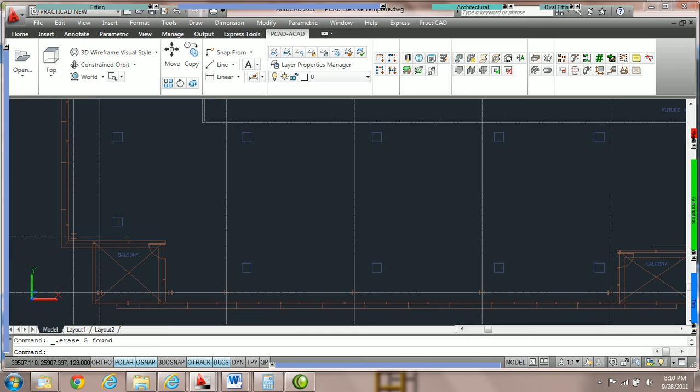Then I'm going to zoom into this quadrant and we're going to place a steel beam on the drawing bottom at 10 foot. To do this, let's go into our architectural bin. Remember, the icons in your bin might be different than the one in this tutorial. Select one that you'd like. In this exercise, I'm going to grab a wide flange shape. We're going to open up my catalog. I'm going to choose a W10 by 12, but you can utilize any one that you'd like.

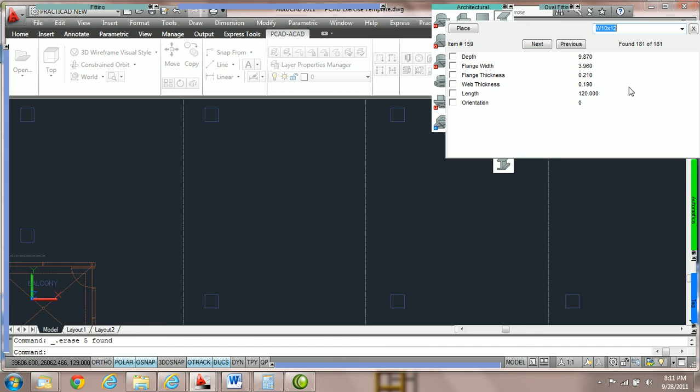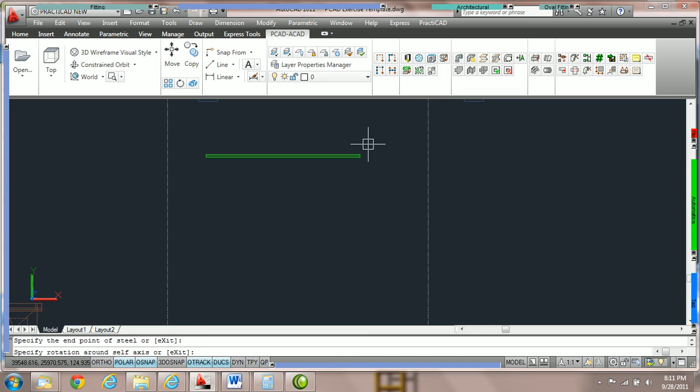I'm going to click on place. And now I'm going to go over to the elevation box and give this bottom 10 foot and hit enter. Once I've done that, I'm just going to simply click on the drawing once to start. You can see that the command line says specify the start point of steel. We're going to click once to start, go over to the other side, click again to stop, and then it's asking us for a rotation angle. So I'm going to type in 0 and hit enter. And that's going to put a steel beam down bottom at 10 foot.

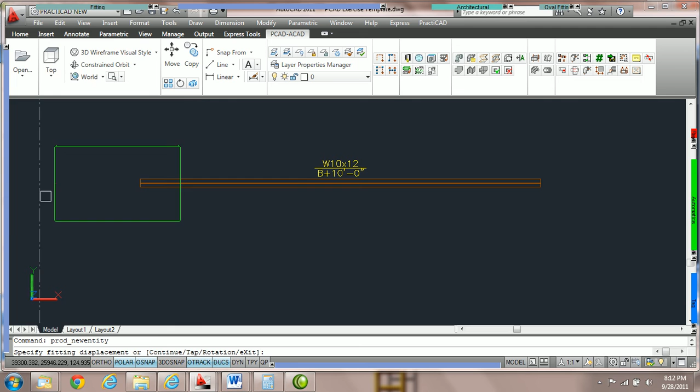Now hit escape to let go of the beam you're holding, and let's go put a fitting on the drawing as well. We're going to go into the fitting bin. We're going to choose a piece of rectangular duct and click once. In this exercise, the size does not matter, so we're going to come down into the elevation and put bottom at 8 foot and hit enter.

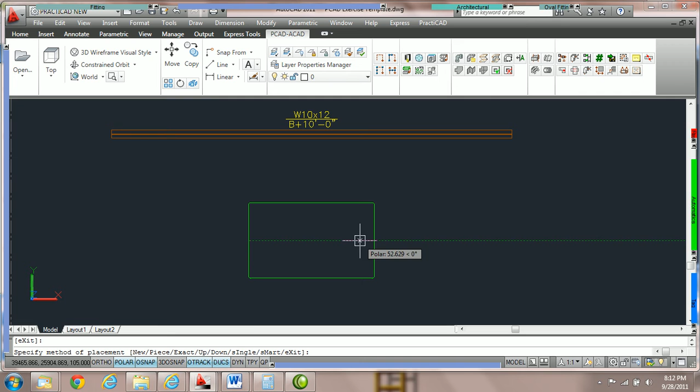Then place your fitting on the drawing a little bit below the steel. Anywhere is fine. We're going to click once to start. It's asking for rotation. We're going to click a second time, and then we have to click a third time. Notice the routing parameters are out. We're going to click again to place down the fitting. Now I'm going to right click and hit cancel to let go of the fitting we were holding. And now it's time to place down a linear dimension.

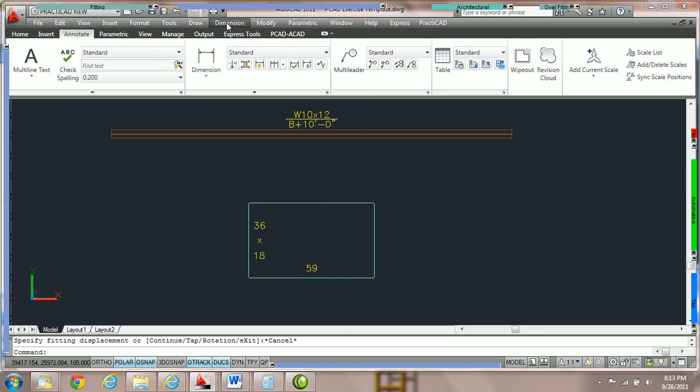The linear dimension tool can be activated from a variety of areas. In this tutorial, I have a PractiCAD ACAD quick bin with a linear dimension tool here. But if you're using ribbons, you can go to your annotate, and as a default, AutoCAD should have a linear dimension tool right here. You can also go into the dimension menu and choose linear. So whichever one you're comfortable with, it depends if you have menus or ribbons on your screen. So we're going to grab a linear dimension. And you can see that AutoCAD says specify first extension line origin or select object.

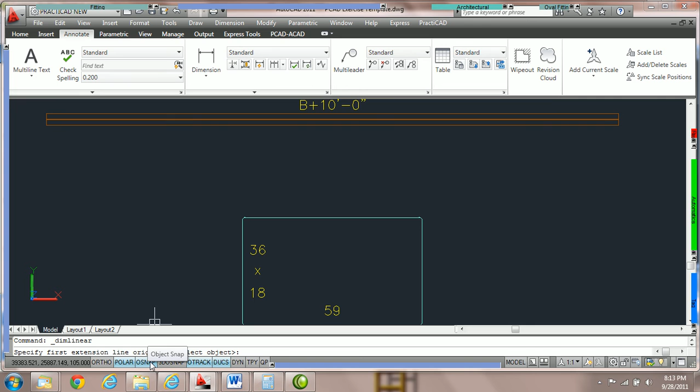Now we're going to choose where we want to start from. But before we do that, two things must happen. First, we must have our O-snaps on. Notice down here that O-snap is depressed. If your O-snap is not depressed, you must depress it. If you don't, you're not going to see that object snap that we need to grab a hold of. And we want to grab a hold of the nearest node. So you have to have the nearest object snap checked. And you can see here that if I right click on OSnap and go to settings, that nearest is one of the ones I always leave checked.

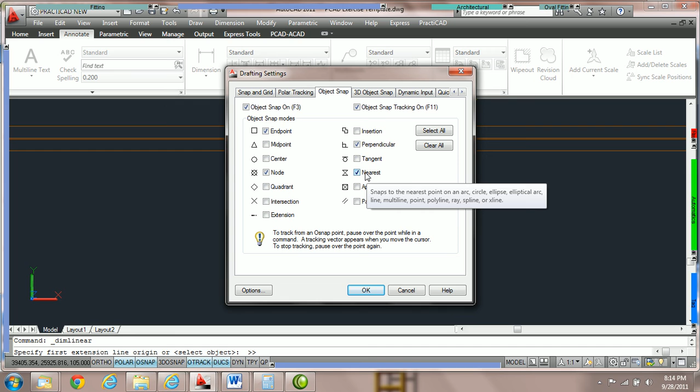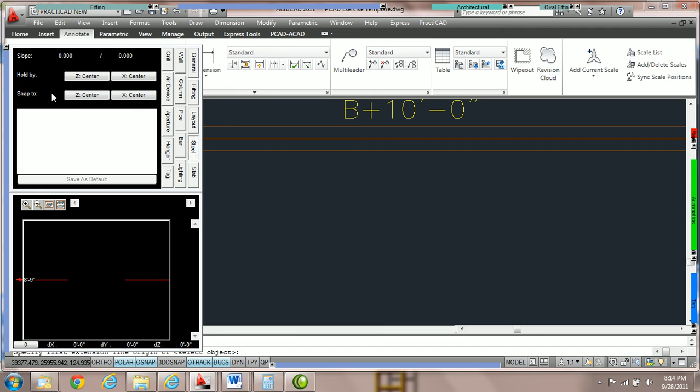So I've got that. Now we need to make sure that we're grabbing the right part of the steel. Most likely your steel is already set to hold the nearest snap by center. But to make sure, let's go over to the fitting box or the item box and let's check the steel tab. And when we do that, we have the command snap to. And mine is currently set at center where we want it because we're going to dimension from the center line of steel all the way to the side of the duct. So under snap to, make sure you've got center.

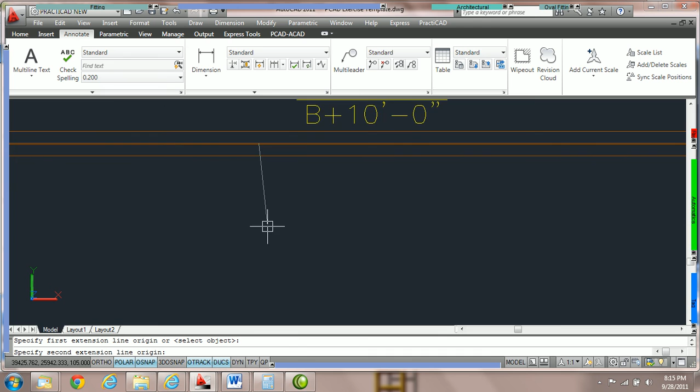Steel tab, snap to. And then we're going to click once to get control of our drawing space again. Remember, whenever we go from the item box to the drawing space, we have to click once to be able to get control again. It's a safety feature. Now what we're going to do is click once to start the line, and then when you get the node lit up, click a second time to end the line. And right here you're going to have a dimension line, which you can move and shift up and down, right in between the 2 points we want. Remember, if your numbers are different values, that has everything to do with dimension styles, and there are some separate tutorials on dimension styles.

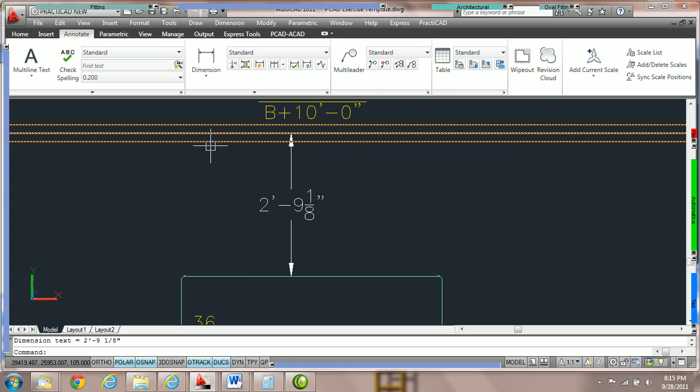The next thing we're going to do is dimension from the side of the beam to the side of the duct. To do that, we're going to grab a dimension. This time I'm going to do it from the ribbon. I'm going to click on the dimension tool. And then we're going to go over to the item box and choose X right. Going to switch snap to center right. And then we're going to click.

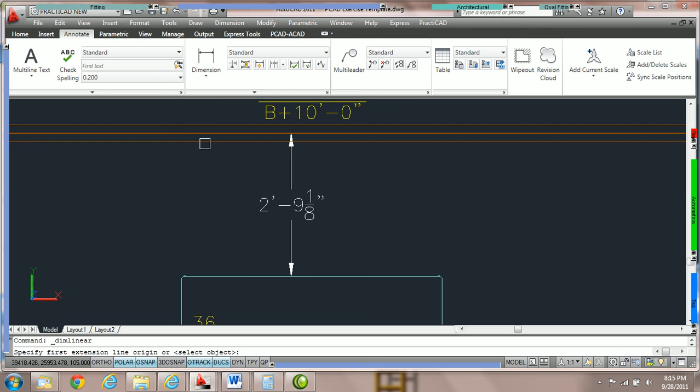And notice here, depending on the way you drew your beam, remember you might have drawn your beam left to right or right to left, and that's going to affect which node you're highlighting. But I'm holding the right portion. So once I see that node, I can just simply click once, and now I've got the dimension line starting, and then I'm going to click again, and now we can see we've got a dimension line between the center and outside wall of the steel to the wall of duct.

That's going to conclude the exercise on dimensioning and using the snap to commands. There's also going to be an exercise on using snap to hold points for the point elevation tag.